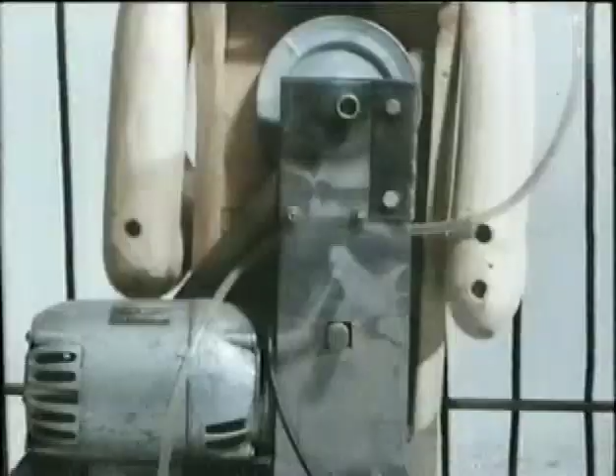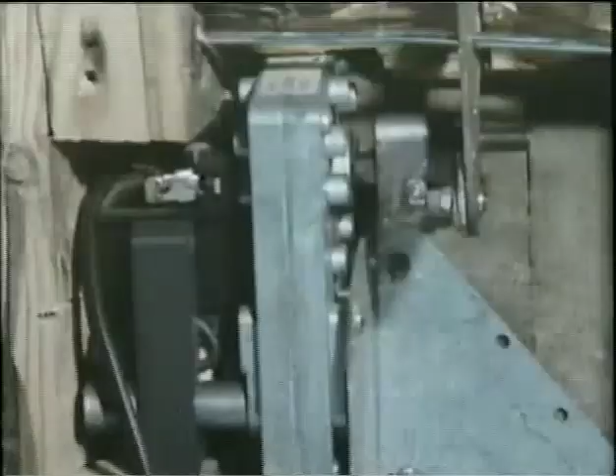Some of my sculptures are made for particular sites, and others, like this one, go on tour around art galleries and fairs. I get great satisfaction from building machines that make people laugh. The frustrating thing is that, like all other machines, like cars, pocket calculators and even planes, they can go wrong.

This is the sort of trouble I have. People feel cheated if it doesn't work.

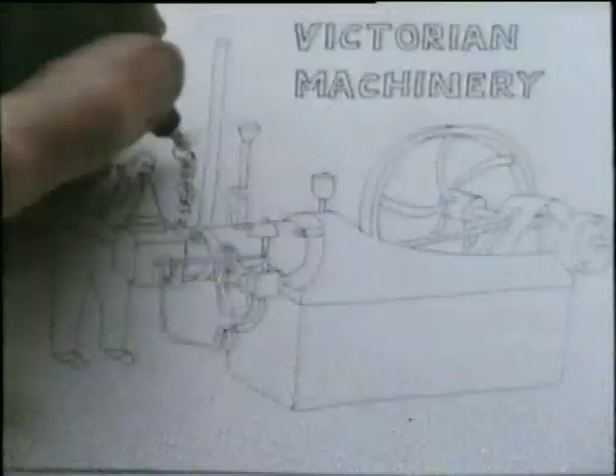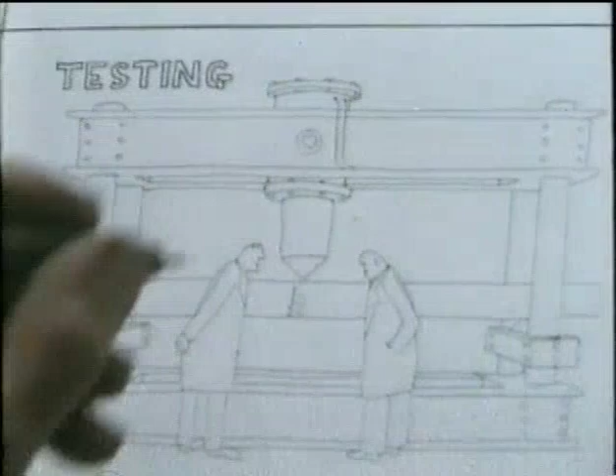So this programme's rather a personal look at the subject, drawn partly from my own experience with machines and partly from facts I've picked up while researching the Rudiments of Wisdom cartoon. It's divided into 5 parts. First, there's a bit about Victorian machinery and how it probably wasn't any more reliable than machines are today. Second, how engineers tend to be intensely conservative about design to make machines more reliable. Third, there's a section about testing and how it often doesn't prove the reliability of new components. Fourth, there's a bit about aeroplanes and things that need to be totally reliable. And last, there's a bit about the perils of fiddling with machines.

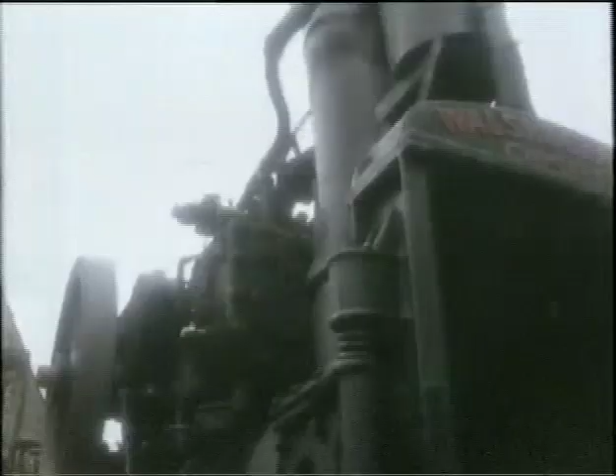Steam engines are very impressive. You can see what every part does just by watching it.

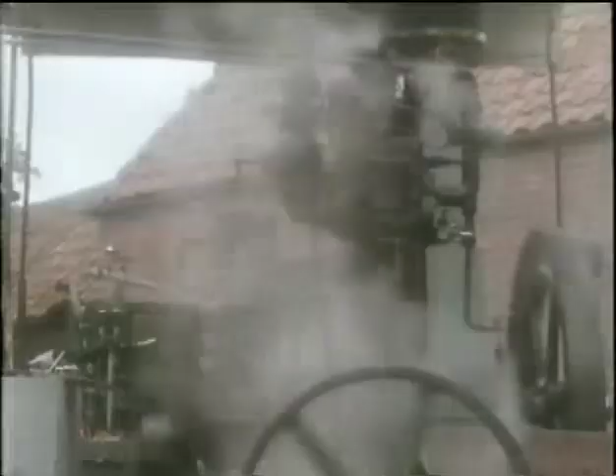However, the ones that survive were among the best machines of their time. The unreliable and badly made ones have all disappeared.

And even the ones that look most impressive can have their problems.

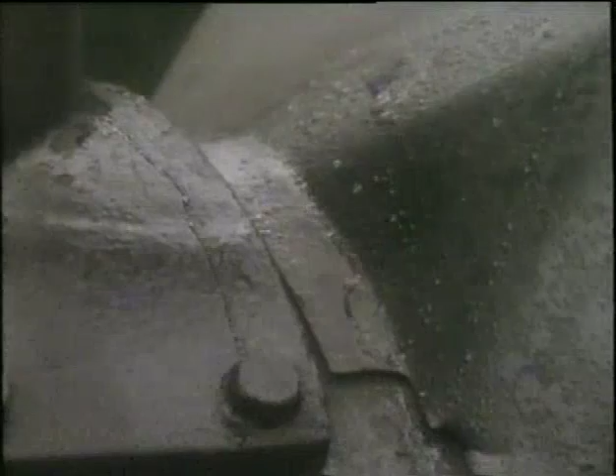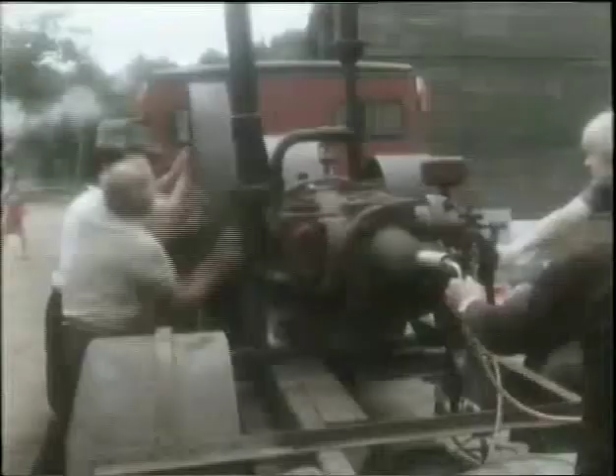This 1912 petrol engine is affected by damp. It can take half a dozen men over an hour to get it going. That's it, she's away now. She's going, she's away... no.

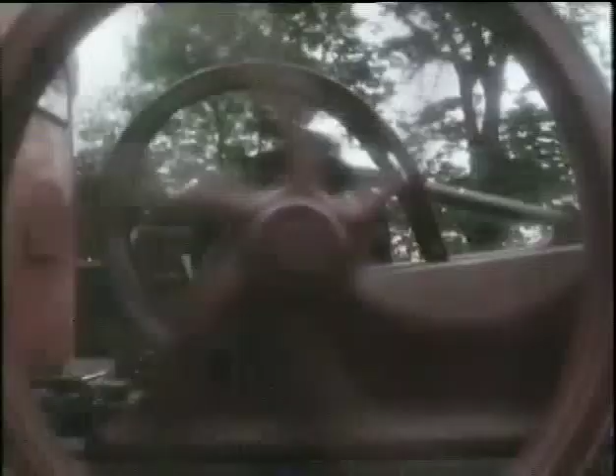She's away now. Just because a machine is made to last forever doesn't necessarily mean it's reliable. This machine has been unreliable for 70 years. It's solid enough to go on being unreliable for another 70.

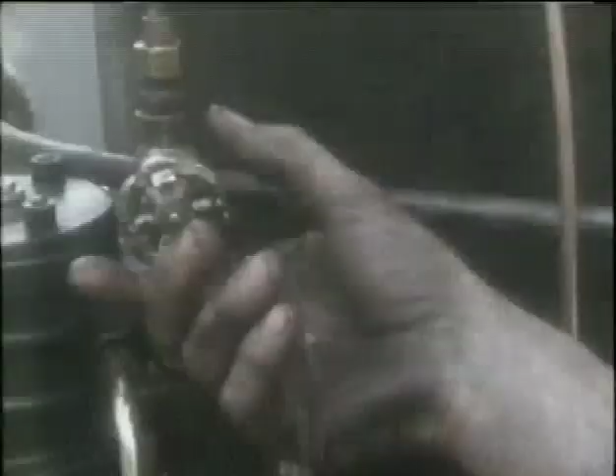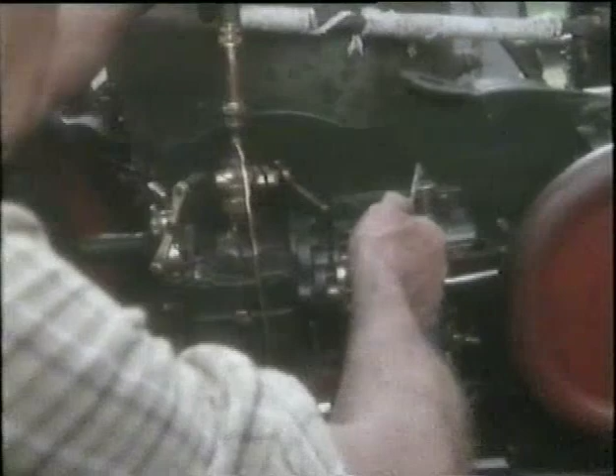An important difference between Victorian machinery and machines today is the degree to which they can be repaired. In the early 19th century, most machines were repaired by local craftsmen, making their own replacement parts where necessary. Farmers have continued this tradition until recently. As machines became more complicated, parts became interchangeable, and firms started selling spares to be fitted by local tradesmen.

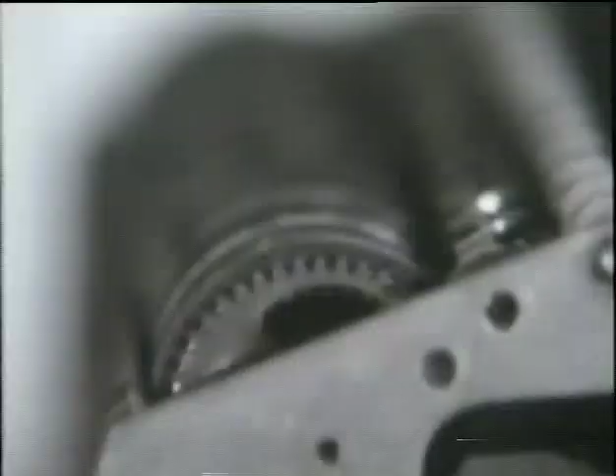If something like this adding machine broke down, spare parts would always be available to repair it. A modern plastic calculator would simply be thrown away. Replacing one is cheaper than repairing it.

It's a consequence of modern assembly techniques. Gluing parts together is cheaper than using nuts and bolts. It doesn't necessarily make things less reliable, it just means they have a limited life. Plastic's almost impossible to repair, so there's no point in making the other components last longer than the plastic ones. Today, this limits the life of even the most expensive machines.

But immortality is not always good engineering. A more practical ideal is this: all the parts are designed for the same limited life.

Another principle of good engineering is to build on your own past experience. With this machine, I didn't. It's called the Q, and it lives outside a bakery in Neal's Yard, Covent Garden. As an experiment, I used silicon chips for the timer.

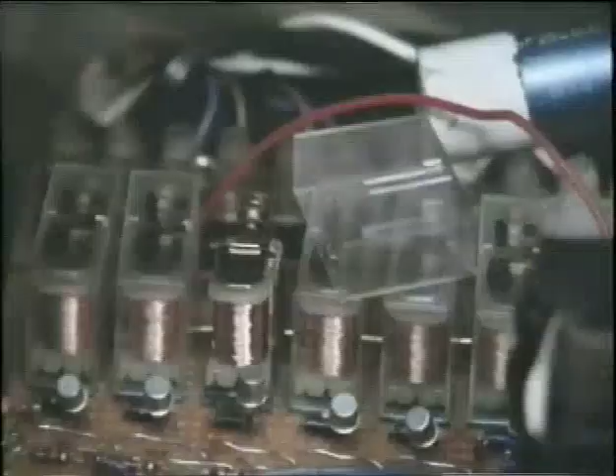On one disastrous occasion, they forgot to empty the coins. They piled up so much that they fused all the circuits.

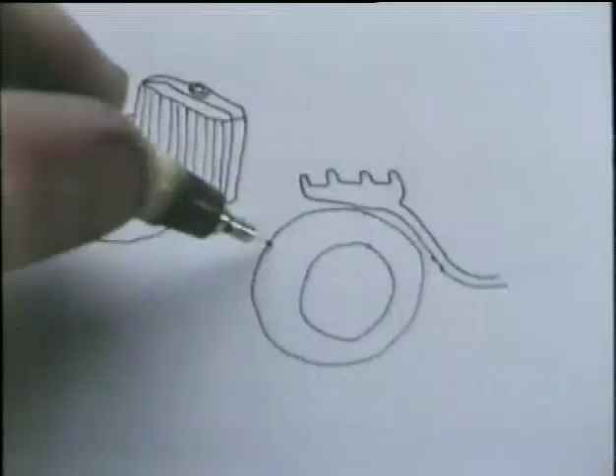The principle of using units you've used before and that you know work is widely applied to make machines more reliable. The car's a good example. A new design of car uses at least 90% of components already tried and tested on previous models. The layout and major components have changed little since 1905.

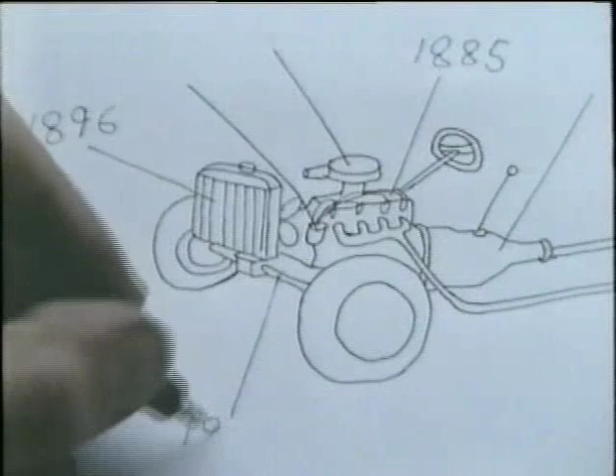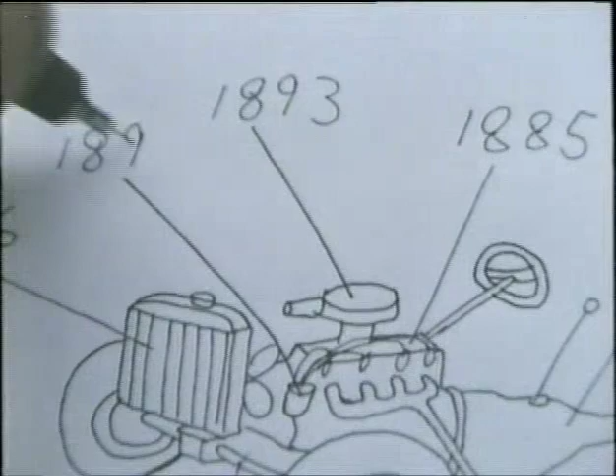The petrol engine's the development of Gottlieb Daimler's. The radiator water cooling system was first used in 1896. There's also Ackermann steering, the differential patented for tricycles, Wilhelm Maybach's carburettor, and the Bosch spark plug ignition. And in fact, if you date the rest of a car in this way, you find that most of the parts are simply improvements on the originals.

This conservative attitude to design has led to cars which are quite efficient and reliable, but boringly similar to each other.

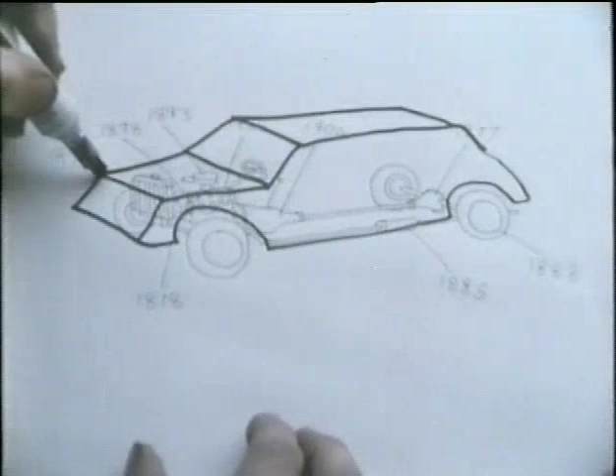It's often said that if as much money had been spent on the development of the steam engine as we've spent over the years on the petrol engine, it could be at least as efficient and convenient. It would certainly have a lot cleaner exhaust.

The APT, the Advanced Passenger Train, is an example of trying to change too much. Almost every component's new, designed from scratch. However, the lightweight gearbox overheated, the brakes kept seizing, getting power to enough wheels was difficult, and, of course, the famous tilting system jammed. After 10 years' development, much of this innovation may now have to be scrapped before the train's reliable enough to go into service.

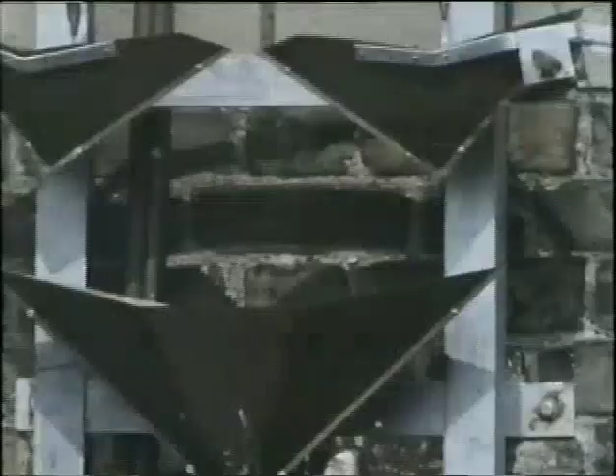This may turn out to be my version of the APT. It's a combination of a lot of things I've never attempted before.

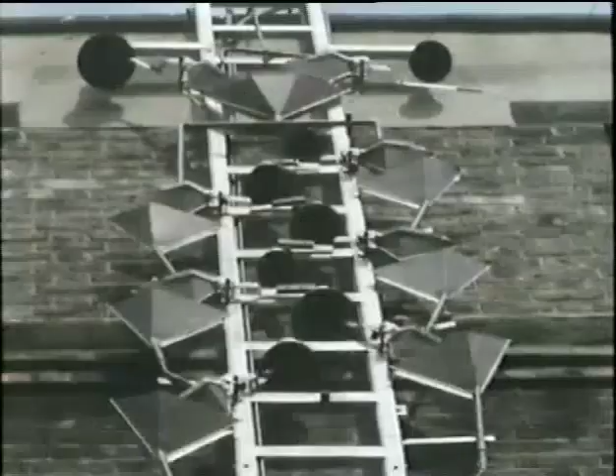It's a water clock that I and my partner, Andy Plant, finished in June for a shop in Covent Garden. This tube shows the minutes with a rising float. We've had some trouble maintaining a constant flow. On the hour, when the tube's nearly full, an electric timer empties it. Simultaneously, water is released from a separate tank on the roof. The water operates the bells, and also the figures at the bottom.

As the water level in the troughs rises, plastic flowers come up on floats. There are also other surprises.

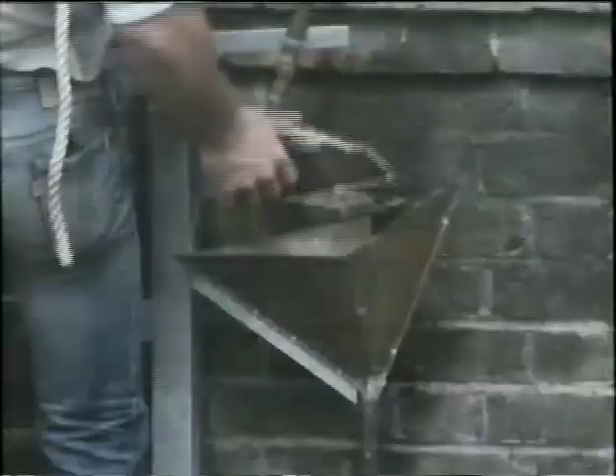Neither Andy nor I had made anything like this before. We've had to go back a few times since it was installed to sort out teething problems. We don't yet know if the whole thing will keep getting clogged up with dirt. The dust from the building site next door hasn't helped. We don't yet know how long the bearings will last, and we're not quite sure what will happen in winter. We thought of adding antifreeze, but our current scheme is to fit an immersion heater in the tank on the roof.

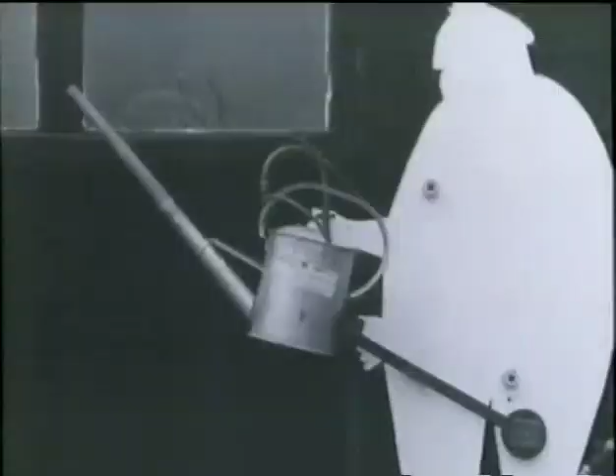Before we installed it, we tested the whole system out on the side of my workshop. We found we could reduce the splashing by fitting baffles to the cups that ring the bells, and rubber tubes to the watering cans. We ironed out lots of problems. Testing it out like this was extremely valuable.

Before being put into a machine, any new component is thoroughly tested under extreme conditions till it wears out, like this aero engine.

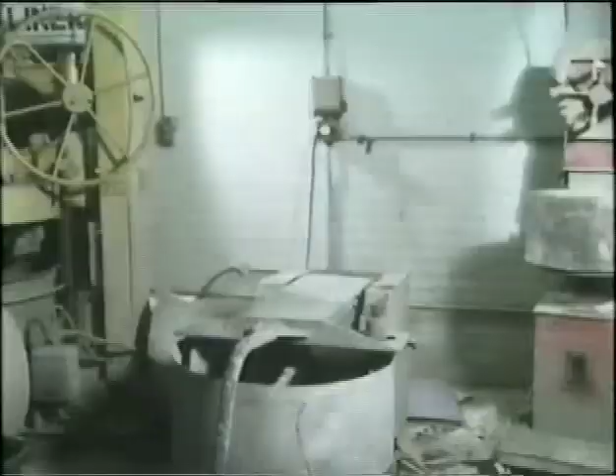Tests aren't always reliable. One of the commonest reasons why they fail is the so-called human factor. A good example is quick-drying high alumina cement. After years of exhaustive testing, by the mid-70s it was widely used in pre-stressed roof beams. Several of these have collapsed.

The problem was that in hot weather, if slightly too much water was mixed in, a slow chemical reaction occurred, which eventually destroyed the strength of the concrete. In practice, it was easier to pour the concrete when it was slightly too runny. The designers didn't anticipate and test how the contractors would actually use the stuff.

Testing the life of materials, particularly ones that have to last a long time, is always difficult. The long-term safety of storing radioactive nuclear waste, for example, is almost impossible to test.

Paint's an interesting example. That's very difficult to test. Pigments mixed with linseed oil are amazingly permanent. During the Renaissance, when they were first used, no one could have known this.

Leonardo was a great experimenter. Many of his paintings have been lost because he experimented wildly, using resin, wax, tar, urine, and even insects. We're probably quite lucky that any of his famous work has survived at all.

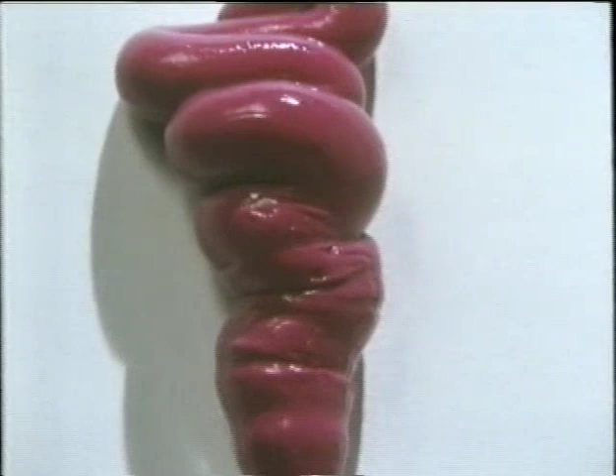Acrylic paints are now widely used instead of oils. No one can yet be sure how long they'll last. They've only been around for 20 years, but the chances of success are pretty good. Almost all the pigments are the same as those used in oil paints, and some, like sepia, yellow ochre and vermilion, have been around since Roman times. Only the medium, acrylic resin, is completely new.

The dyes used in colour films and snapshots certainly deteriorate. This promotional film from 1952 was once full colour. Now it's almost all faded except the magenta. Most film archives are now kept in cold stores to slow down this effect.

Take a bow, George. I don't know how you do it. If I were to tell him how I do it, what a laugh there'd be. Horlicks.

This tissue paper sheep is probably the most difficult thing I've ever had to test. The talcum powder stops the paper sticking when it's folded. It's one of 300 commissioned by the Pink Floyd pop group for their 1977 American tour. The sheep is loaded into a cardboard shell and fired in the air by a gunpowder charge. I hadn't tried one out since they were made, and I wasn't sure if it would still work.

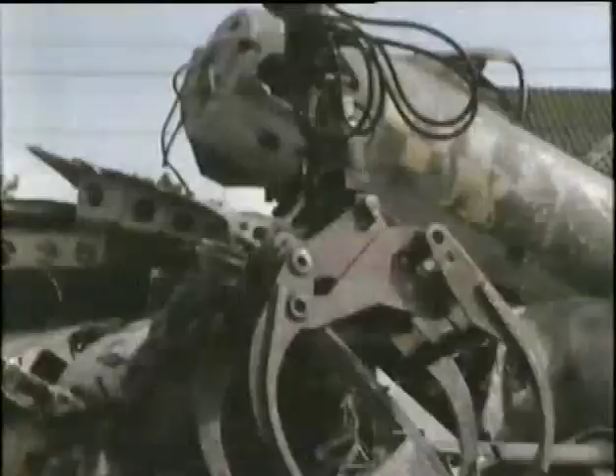This isn't a plane crash, it's a scrapyard. They're mostly bits of 707 over there with a Hunter on the top there. I love scrapyards. And they're actually quite good places to see how planes are made.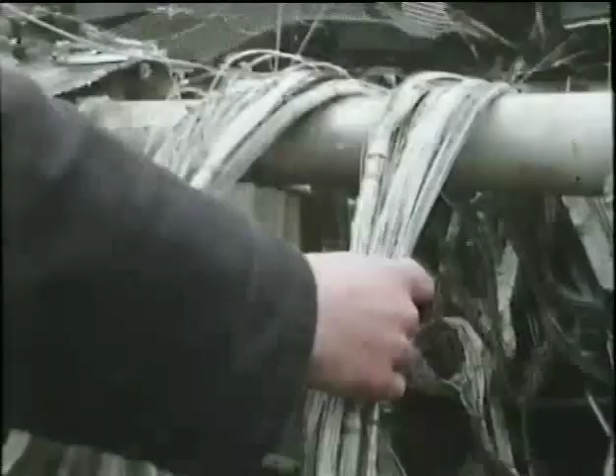All aircraft are designed to be fail-safe, or to use the technical jargon, damage tolerant. For example, there are 2 joysticks, 2 sets of control wires, and a lot of the wiring is duplicated. For all the essential systems, there are backups. But this isn't infallible.

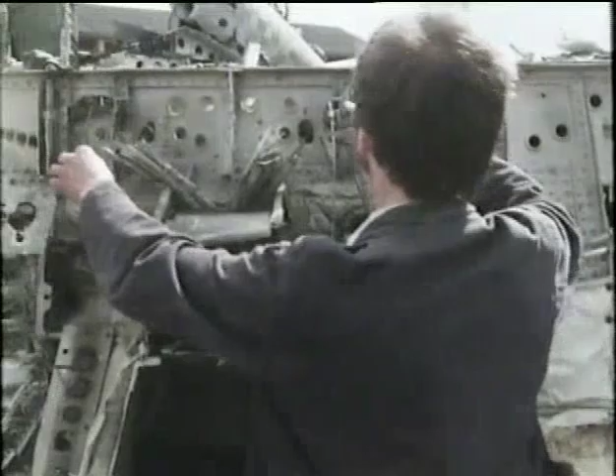For example, in the DC-10 crash in Paris, when the cargo door fell off, the cabin floor collapsed, and this severed not only the main cables, but also the backup cables as well. When all the parallel systems fail at the same time, this is called a common mode failure. It's usually fairly disastrous.

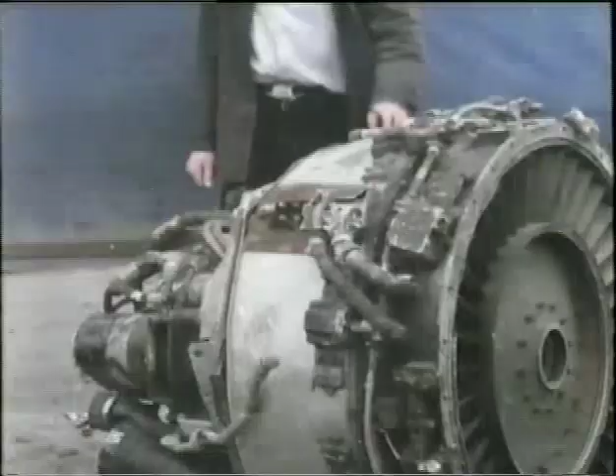One way of preventing this is to build in different systems that work in different ways. For instance, electric power can come from generators driven by the engine. It can also come from the hydraulic system, the hydraulic pump, and it can also come from batteries, all at the same time. Since the DC-10 crash, the control lines now have to travel by different routes to those of their backups. It's an attempt to avoid a common mode failure. And even this is not infallible.

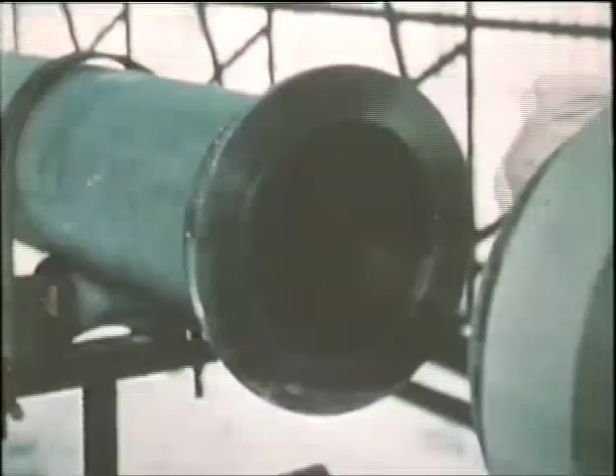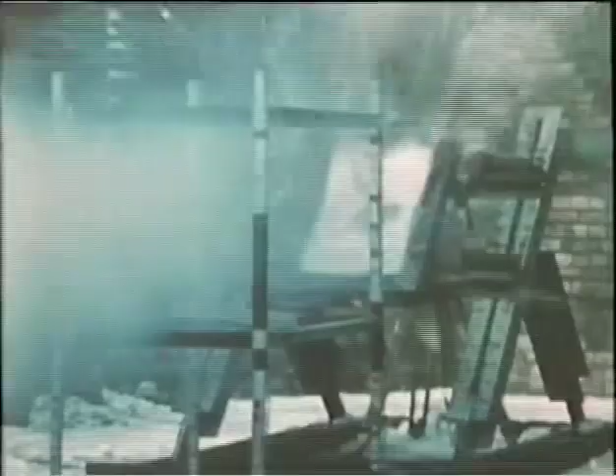Dead chickens like this are used in a series of tests designed to find out what happens when a plane in flight hits a bird. Bird strikes can be a major hazard, especially on takeoff. A pre-packed bird is loaded into a compressed air gun and then fired at different parts of the airframe. For example, the pilot's windscreen. Or a wing.

A common mode failure can happen when a flock of birds stops all the engines at once. But this is rare. Usually at least one engine can be restarted, and all modern airliners are built to keep flying on just one.

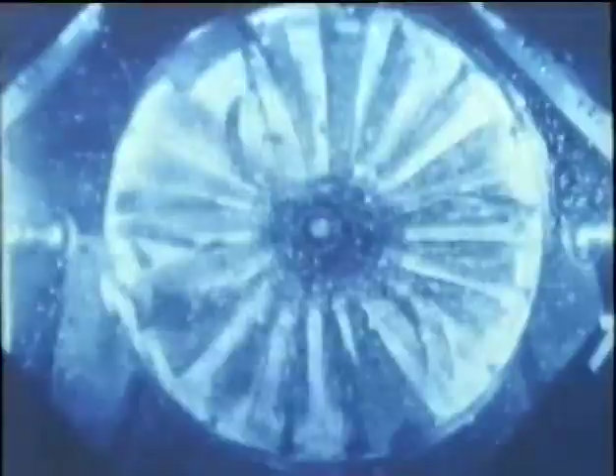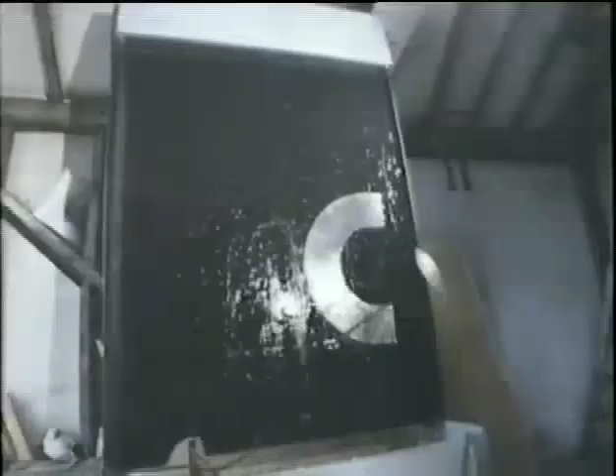My most reliable machine's in Carnaby Street. It's nowhere near the same standard as an aeroplane, but it does use the same principle of having backup systems. It's a water-powered sign for a shop called Cascade, and it's supposed to operate continuously for 12 hours a day. This is the prototype in my workshop. The complete thing is 24 foot wide.

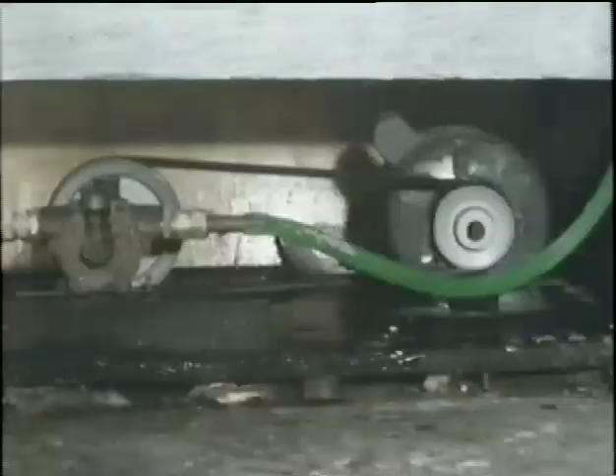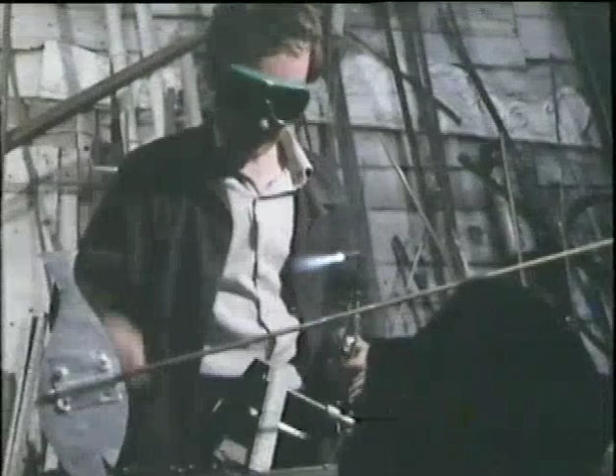This burning desire to make the thing reliable is not through any great love of craftsmanship. The less it breaks down, the less I'll be called out to repair or maintain it.

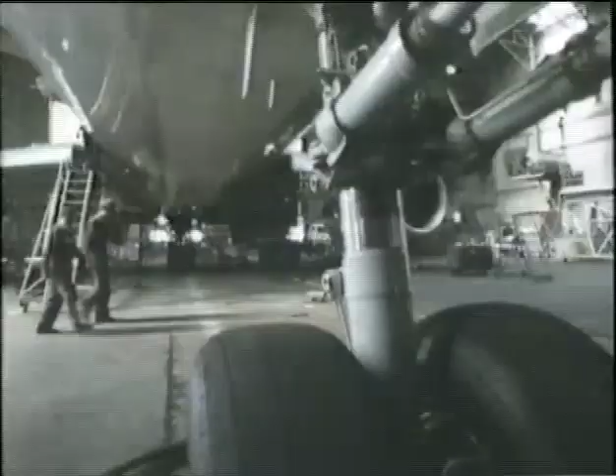With airliners, regular maintenance is essential for safety. A traditional technique used to ensure reliability has been to assign a life to every component. At the end of its rated life, it would be changed, although it would almost certainly still be working perfectly. Every time the plane came in for maintenance, a few parts would be replaced, like this heat exchanger. However, it's obviously expensive and wasteful changing perfectly good parts.

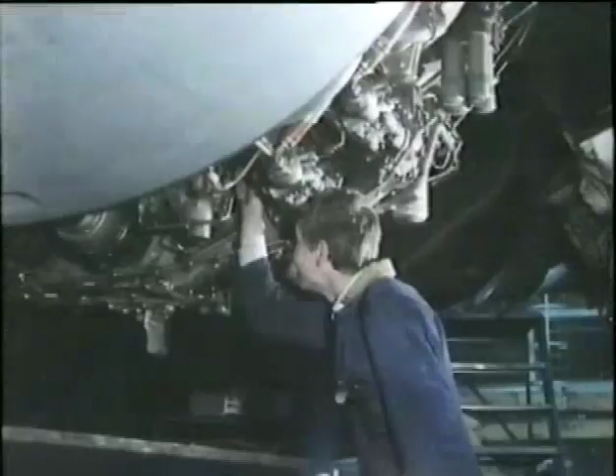A new method of maintenance is taking over. It's called condition monitoring. Various test circuits and procedures are designed into the plane. In the engine, the turbine blades are inspected with an optical fibre device called a borescope. Oil filters are examined to see how many fragments of metal have worn away.

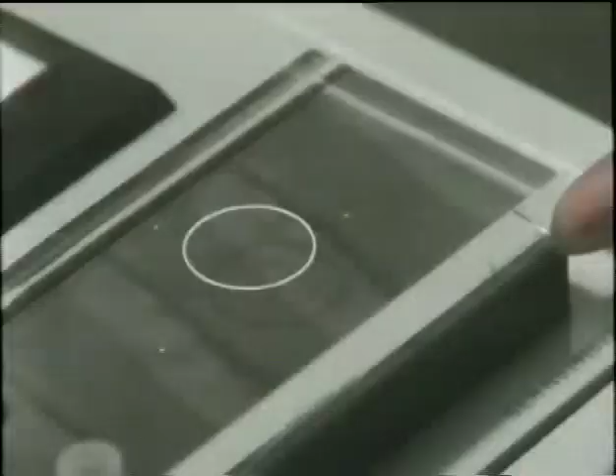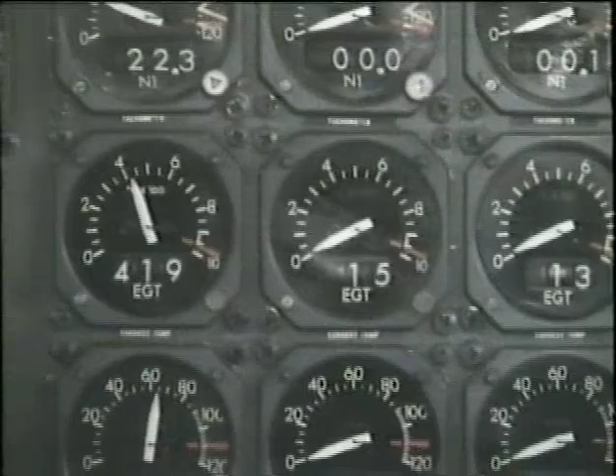The idea is that you run through these tests every 500 flying hours and leave everything alone unless one of the tests reveals that something needs doing. The engines are also run up to speed on the ground. A lot of information about their condition can be deduced by careful analysis of their temperatures and pressures, etc. Engine vibration is also measured, and all these recordings can give some indication of parts beginning to wear.

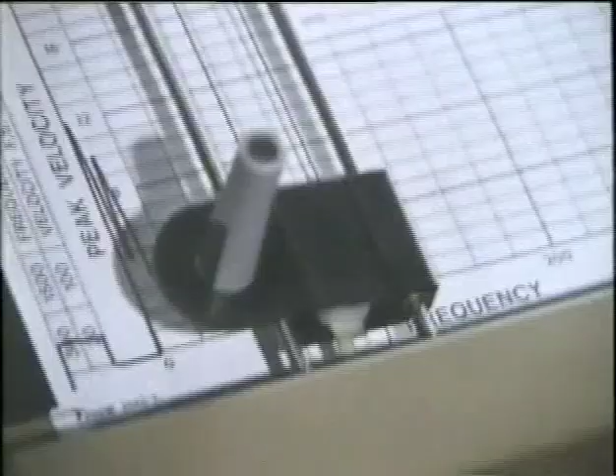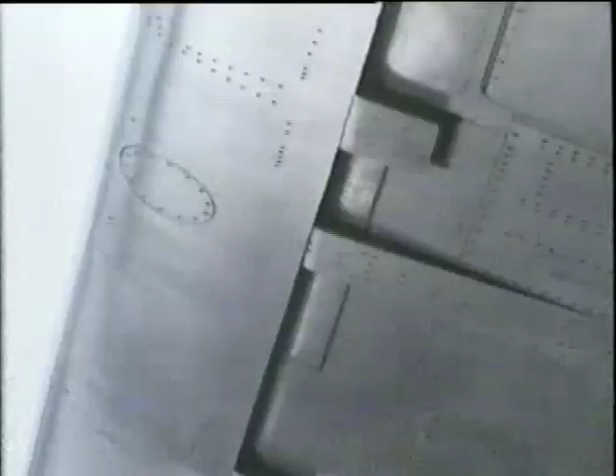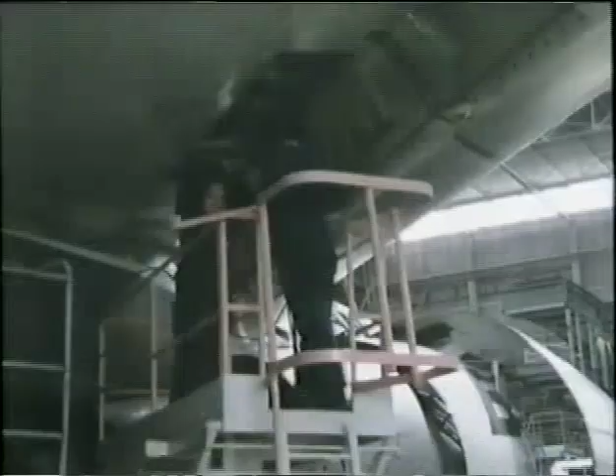McDonnell Douglas, who make DC-10s like these, sell the concept with the catchphrase, if it ain't broke, don't fix it. Condition monitoring has the disadvantage that there are some faults it may miss. Many parts of the airframe are inaccessible and can suffer from metal fatigue without being noticed. However, since the early Comet disasters, there are remarkably few examples of this.

Condition monitoring has another advantage. It's often best to leave things that are working perfectly well alone. Any repair runs the risk of introducing a bit of dirt, wearing the thread of some vital nut, or forgetting to replace some vital part. In the past, aircraft accidents have almost certainly been caused by this kind of fiddling.

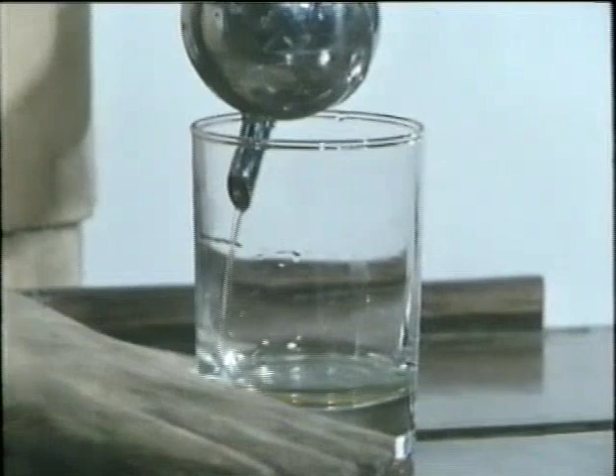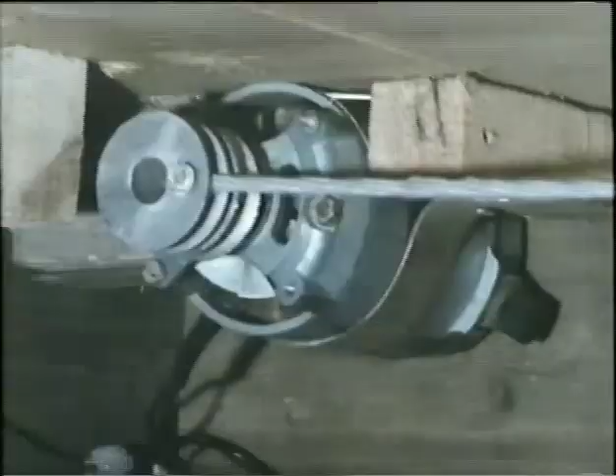The principle of leaving well alone can be useful. There are many mechanisms in my machines which ought not to be reliable, but which have withstood many thousand operations. The glass is shot along the bar by an old spin dryer motor underneath. When his hand reaches the end of its track, the motor stalls. I was expecting this to burn out the motor, but it hasn't, so I've left it alone.

I think this fiddling is why many vehicles become unreliable. When one thing goes wrong, a lot of damage can be done searching for a fault. Many bits and pieces are disturbed and never work properly again. A knocking noise which started coming out of my Transit a little while ago is a good example of this.

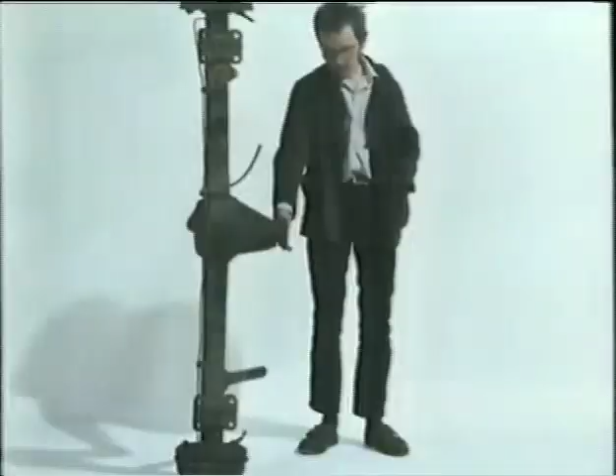A local mechanic convinced me that the noise was coming from the differential gear. I replaced it with a differential from a scrapyard, but still the noise remained. After further conversations with the mechanic, I decided the fault must be in one of the universal joints. I replaced both of them, but this made the noise worse.

Then I noticed a bulge in a tyre. This turned out to be the source of the original noise. Having replaced that, I was still left with the second, worse noise. After fitting yet another differential to no avail, I finally cured it by having the prop shaft rebalanced. Unfortunately, I'd forgotten to put any oil in the new differential.

I don't want to imply that one should do nothing to a car until it breaks down. Listening for noises, watching the exhaust and looking for oil leaks can all be valuable forms of condition monitoring. However, I suspect that extensive DIY repairs can reduce the long-term reliability of cars.

A recent Which survey found that among cars over 6 years old, Volkswagen Beetles were much the most reliable. I now wonder whether this might be due to their policy of discouraging the supply of parts and repairs by DIY mechanics. Unfortunately, the flaw in this theory is that garages are often just as bad, doing just as much damage searching for a fault. I don't think there's any solution.

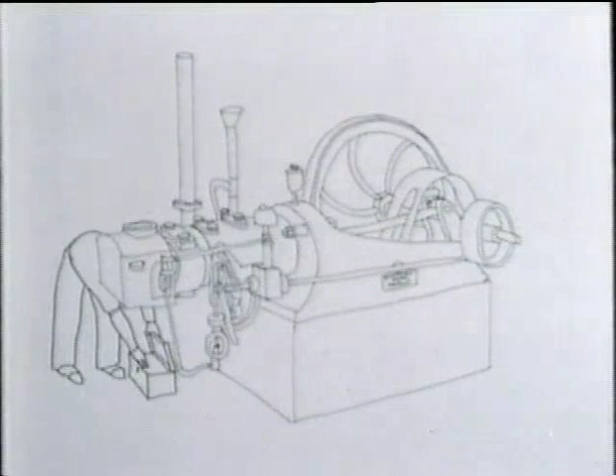Perhaps Victorian machines, despite their indestructibility, weren't any more reliable than machines today. Conservative design, though boring, has at least made cars more reliable.

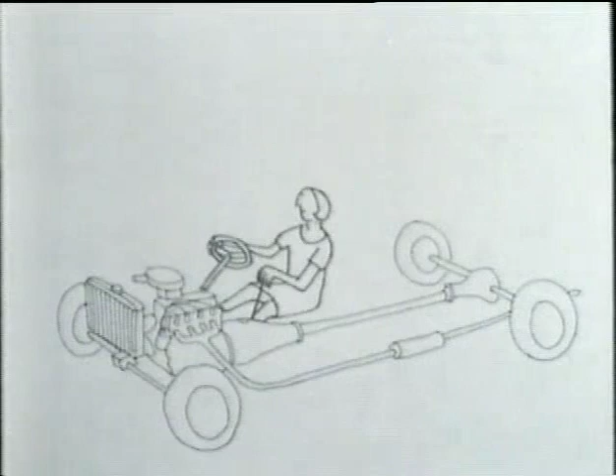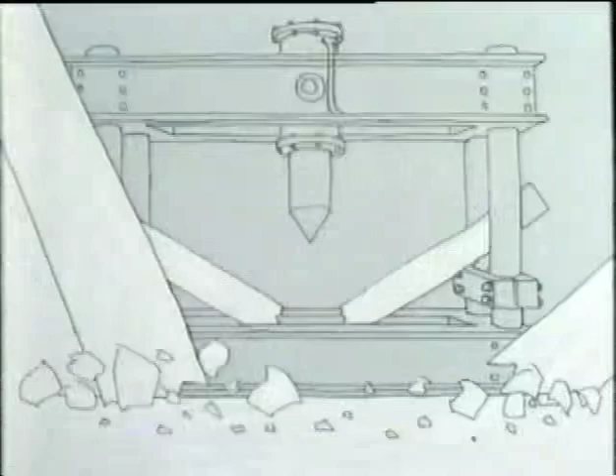Testing is not infallible. 100% reliability is almost unattainable, and fiddling should be avoided at all costs.

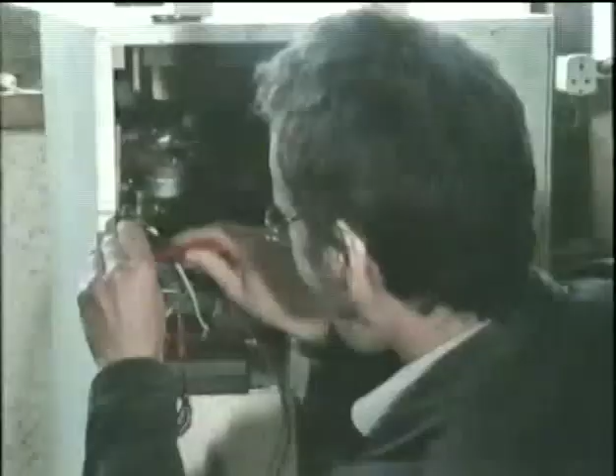Making the machines has mixed blessings. It's very satisfying getting them to work, but they'll never be totally reliable. I sometimes fear I'll end up as a perpetual touring mechanic, fiddling with my life's work. Machines are a source of both inspiration and frustration.